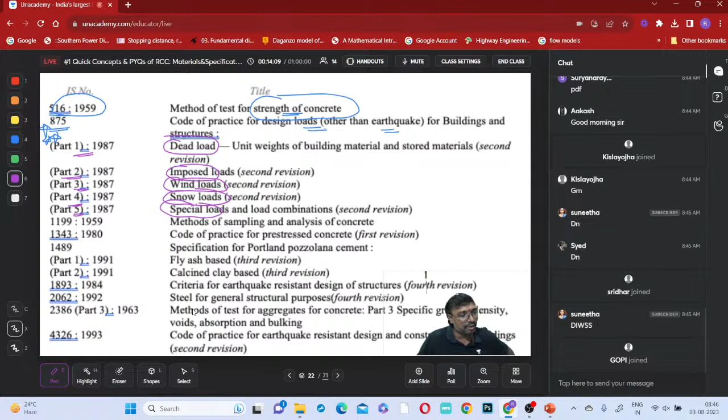You have to be careful. Seismic loads or earthquake loads are present or they are not present? They are not present now? No. So this is about IS 875 part 1, part 2, part 3, part 4, part 5. Is it not clear everyone? Part 1, part 2, part 3, part 4.

Which code is giving the details of which load, everyone? So part 1 is dead load, part 2 is imposed load, part 3 is wind load, part 4 is snow load, part 5 is special loads. Don't remember the years, just remember the parts.

That's it. So now IS 1199 is for sampling and analysis of concrete. 1343, this is also very important code, you have to remember. IS 1343 is for which one?

Code of practice for pre-stressed concrete - latest version is also there, 1980 is the old version, don't worry. And IS 1489, Portland Pozzolana cement specifications, part 1 fly ash, part 2 calcined clay based.

Next, IS 1893 - this is for criteria for earthquake resistant design of structures, right?

IS 1199 slump test, 1020 method of sampling. Actually we are not going into that much detail because those things will be discussed in building materials. Whatever is required for RCC only we are discussing, especially design parts, because KP sir will be discussing the same thing and I will also be discussing it - no use covering it twice. Whenever we come across concrete, we'll see that, don't worry. I'll just give the list of codes for different tests.

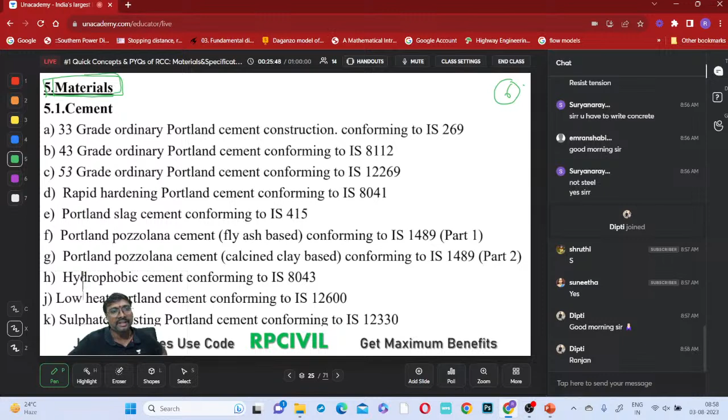Now coming to cement, right? So we'll be entering into these materials, that was just an introduction. What are the design codes you are having, and why you are using steel? That's it, na?

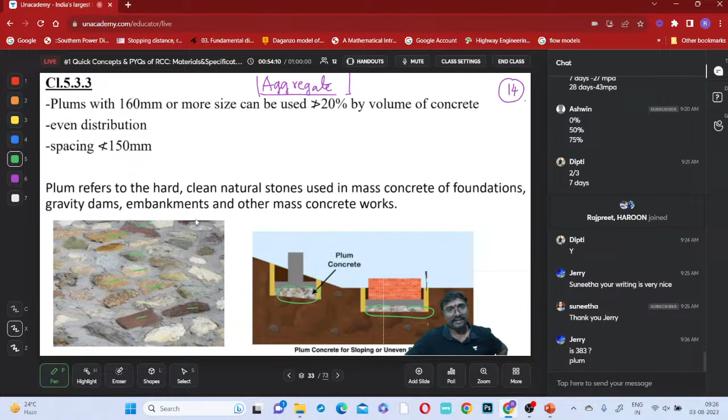IS 383, already we have mentioned this code number in the starting. Do you remember these are called with which name? These are called as plums. So generally, this is a hard, clean, natural stone used in mass concrete of foundations, gravity dams, embankments and other mass concrete works. So these plums are useful for mass concrete construction in the foundation generally.

So for normal building, can we use these plums? No, we don't use plum concrete there. Plum concrete means concrete with plums. What is the plum size generally? 160 millimeter or more size are called plums, and can be used not more than 20% by volume of the concrete. So in the entire volume of the concrete, the plums volume should not be greater than 20%. They should be distributed evenly, and spacing should be greater than 150 millimeter, should not be lesser than 150 millimeter.

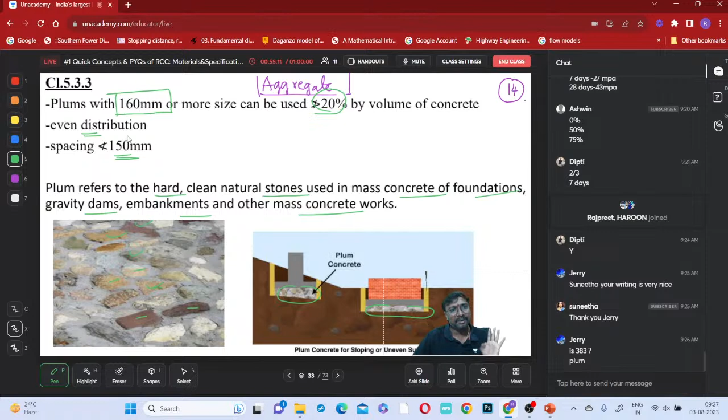Minimum size is 160 millimeter, and maximum percentage is 20% of the volume in the concrete, and they will be evenly distributed, and spacing should be greater than or equal to 150 millimeter. Now these 3 specifications are important here. Clear everyone, these specifications?

Now right, now coming to these aggregates, what is that we are going for these aggregates? Okay, you want me to wait? Okay.

So 3 days I'll take for materials and specifications, because many specifications are there. Remaining chapters will be completed fast, but the first chapter only will take more time. All materials I will be discussing according to RCC, not according to BMCP, okay? You have to be careful again.

Done? Done everyone?

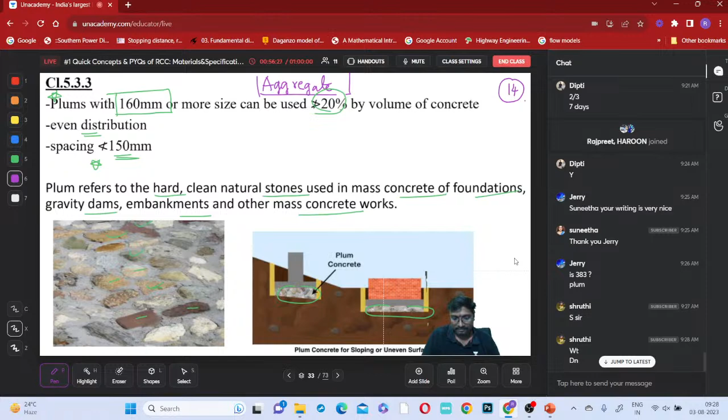Why do we have to maintain this 5 millimeter lesser value? What is the reason? Because if you do not maintain it, if the size of the aggregate is higher, is it possible to place the aggregate particle in the cover portion? It is not possible to place the aggregate in this cover portion if sufficient gap is not there. So that is why minimum 5 millimeter extra gap you have to maintain.

So that 37 minus 32 gives a 5 millimeter gap. Why should we have this 5 millimeter gap between the steel and the aggregate particles?

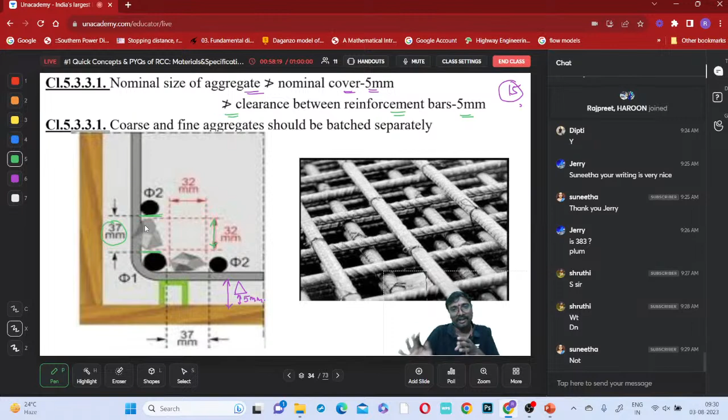Why should we maintain this gap? Because whenever you pour concrete, first you make the reinforcement cage, then pour the concrete. If sufficient gap is not there, it cannot move downward or spread. The reinforcement bars will obstruct the concrete, either in the vertical or horizontal direction.

Yeah, Yogesh, good morning. Don't worry, Ajay. Yeah, I'll be giving which one?

Gaps will be created so that aggregates will be moving comfortably from one place to another, with respect to the horizontal direction also.

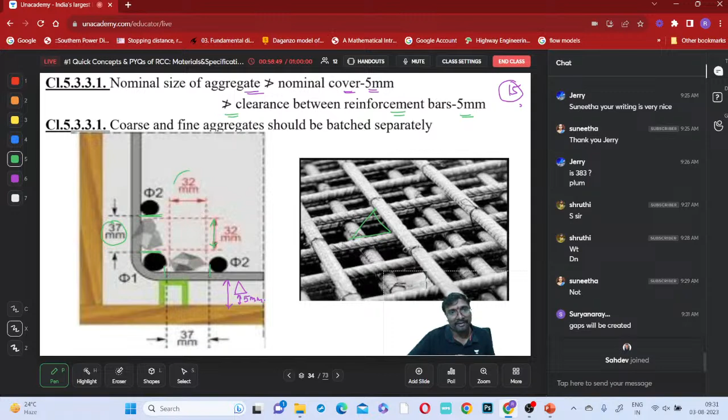Let us say this clear gap comes to be 37 millimeter. So what is the maximum size of aggregate? We have to go for 32 millimeter only. Is it clear everyone? What is the nominal size, the maximum size of the aggregate?

Cover minus nominal cover minus 5 millimeter - it is not the effective cover. Effective cover is calculated from the center of the reinforcement. Nominal cover means from the bottom of the bottommost reinforcement or from the extreme reinforcement surface.

Okay, Sahdev, good morning. Where is Nakul?

So the clearance between the reinforcement bars minus 5 millimeter we have to select, so that aggregates will be moving between the reinforcement particles comfortably from one side to the other, and will be spread uniformly, right? Got it?

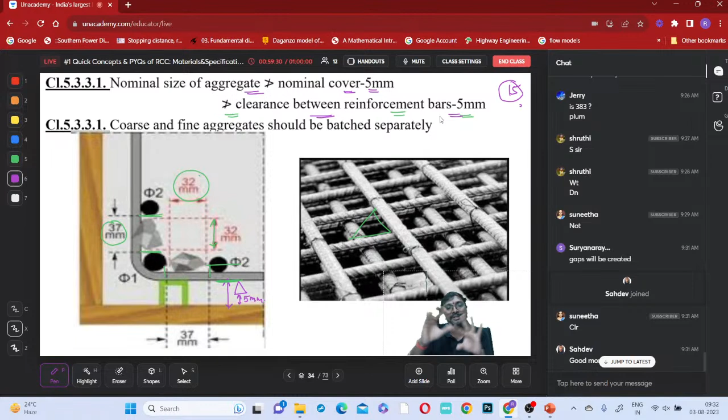The coarse and fine aggregates should be batched separately. What is the meaning of batching? Calculating the quantities of coarse aggregate and fine aggregate separately, not together.

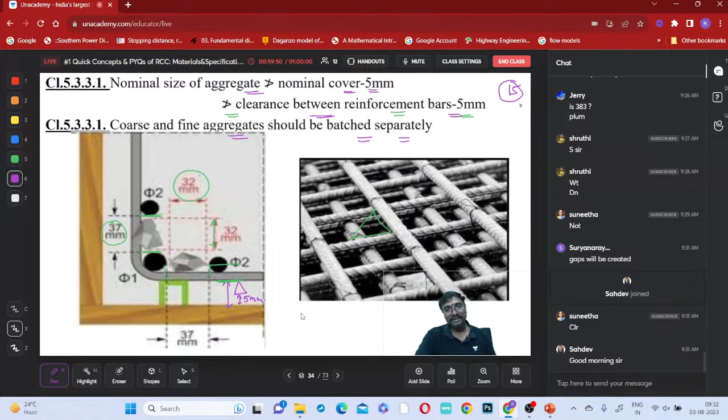These points are clear, everyone? Size of these aggregates related points - are they clear? Okay, once these points are clear, I'll be closing the session.

Tomorrow we'll go for water, next admixtures, then after that concrete. So 3 days we'll be doing this - today, tomorrow, and day after tomorrow, concepts plus questions of this topic we'll be discussing. You'll not be finding anything beyond this.

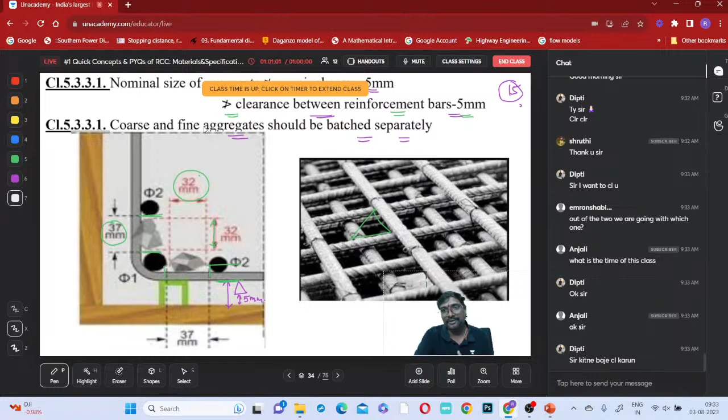Out of 2, which 2? Both must be satisfied, because both must be satisfied. We have to select such that both are satisfied. Whichever is lesser among these two, we select that. To satisfy both means whichever is lesser, we have to select, yes or no?

Suppose if this value you are getting is 25 millimeter, and this value you are getting is 23 millimeter, which one satisfies both? 23 millimeter satisfies both, so you select 23 millimeter. Whichever is lesser among these two, we have to select.

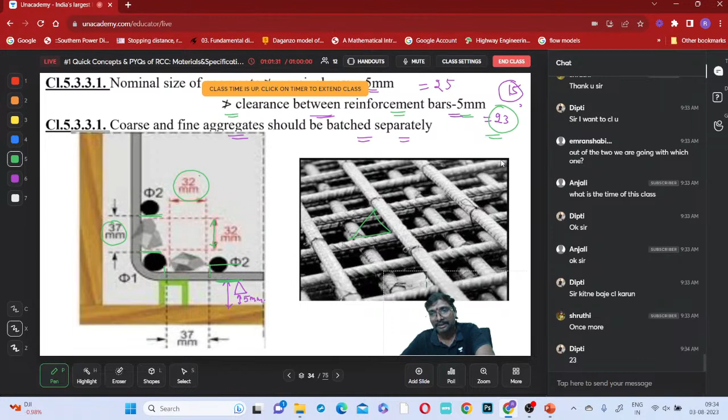Abhi call karo, abhi karo.